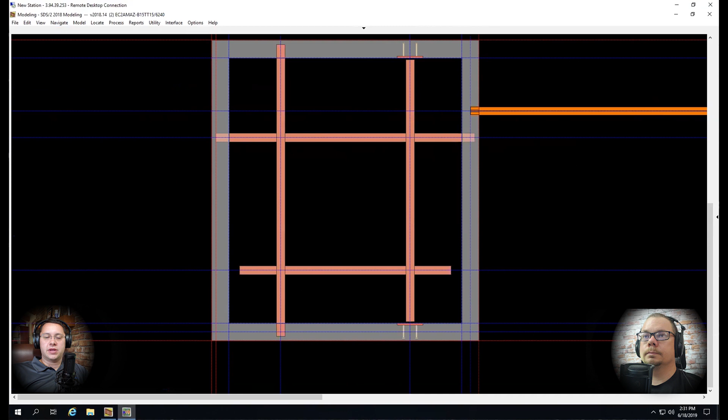So my basic premise here is that the embed plate member is better in a wide variety of situations. So I'm going to have Matt here take you through and show you some of those situations. So should we start off with the most basic bearing plate? Yep, so we're going to do a bearing plate for a beam. And we'll start out by zooming in here.

We've got a beam. Its work point is right to the face of the wall. And then we've given it 6 inches of bearing through its setback. You gasped. If you're a checker out there, this will make you very happy because the important point is always going to be that face of the wall, and then you add your embed after. If your detailers are making you back figure that without using their setbacks, they're bad people, and you should do bad things to them.

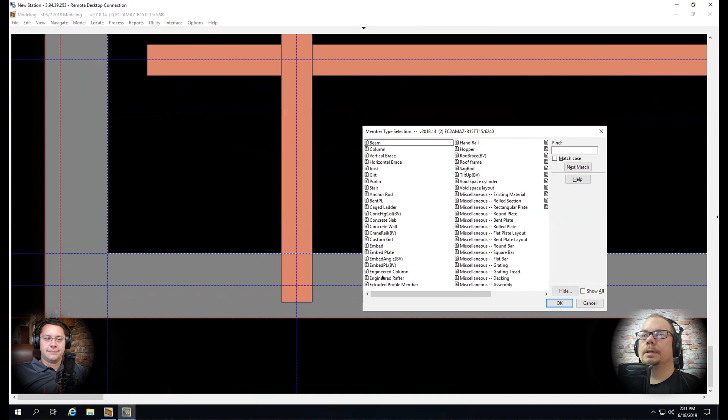All right, so when we select the add member, we're going to go to Embed Plate BV. And this goes all the way back to at least 2017, right? Yes, I believe this came into play in 2015, possibly even in 7.3, but it might be that in 7.3 it was just a parametric, so that may be where I'm remembering. Well, if you're using anything older than 2017, I don't know what you're doing here. You don't want to be listening to us.

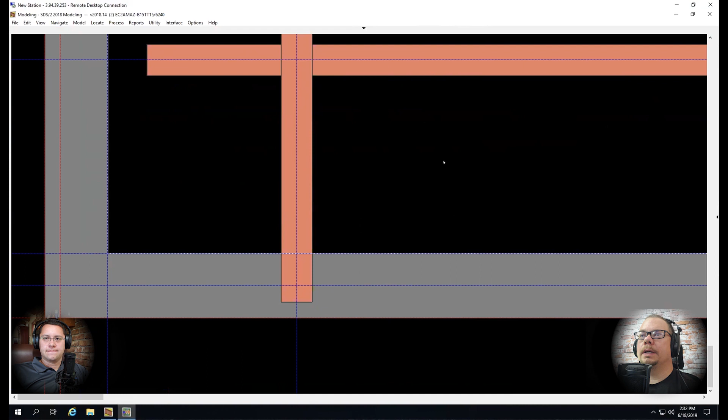So you want to pick this drop down and go select member bearing plate. Okay, and then you select the member. Now, does this have to be a beam? No, it does not. You can also do this on joists, which we will get to next. So in this case, we're going to just do studs spaced. And we want it to occur at the left end of the beam. And we want to set our plan rotation, in this case, to 180. And I don't want any additional setback from the work point. I want it flush with the wall.

It will give you a member x-axis rotation of 90. That's just making it flat level. If it's set to 0, it actually becomes a wall plate, which we'll get into in another couple of minutes. Okay. So it calls that the x-axis rotation, but it's not really the x-axis. Right? It is. That's the member line. It's along the length of the plate itself. So the plate is going to be put in perpendicular to the beam that you're locating from. Okay. So I'll just show you how that works.

So if we do a length of a foot and a depth of 6 inches for our standard bearing and a standard 3/8 inch plate, we can now locate where we want our holes to be, our studs to be. So let's get a spacing of, say, 9 inches. We go 1.5 on each side, and then top and bottom, we want them centered, so we're just gonna split this in half. So we'll go 3 and 3. Now if you move to the studs tab, you can pick the size and length of studs that you want to use. In our case, 1/2 by 6 is fine.

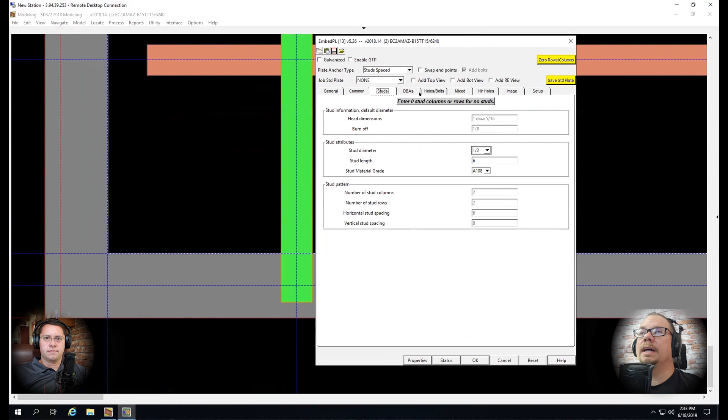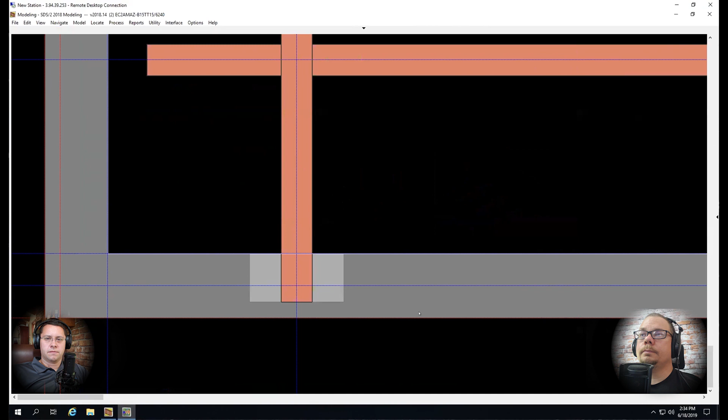And then one thing you do want to check the first time you run this on a project is the nailer holes. It will always default to having 2 nailer holes, which is great for a wall plate, but pointless for a bearing plate. So we'll set that to 0, and it'll now remember that every time we run it after this. And now we can pick again. Same thing. So now we'll go up, click on the same beam,

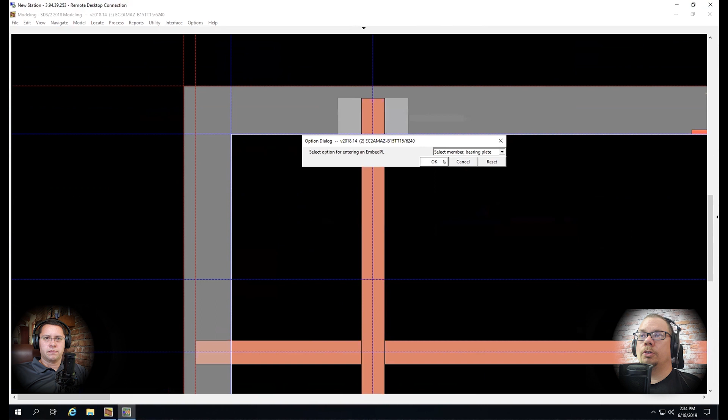and now we're going to go to the right end. Now you have to pay attention to where that member plan rotation is, because that's what's going to adjust where you are relative to the member line. So in this case, we're going to set it to 0. And now it's flipped around. Now just to show you what happens, I'll hit escape. If I...

No, you got to back that up. So the X rotation the first time was 90. Why is it 0 now? Nope, so that's... When you're thinking of the X rotation, and I'll change that right now so you can see what it does. The X rotation is its location along its length, which is going to be set to 90 regardless. The plan rotation has to do with how it's turned around that line on that point on the plan where the wall and the bearing plate meet.

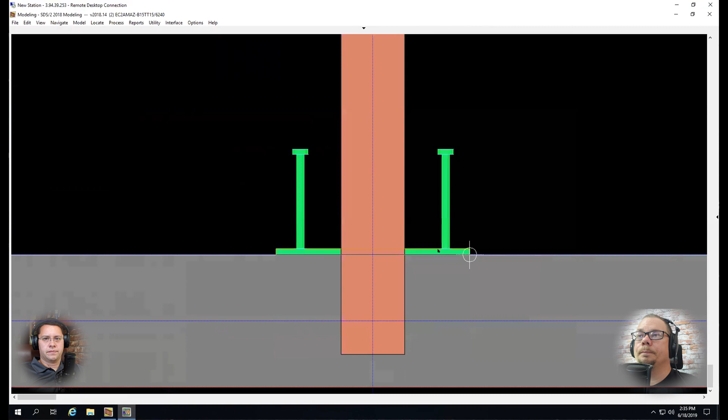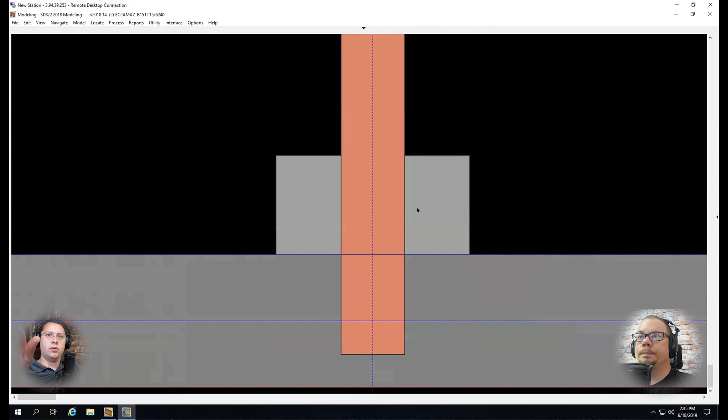So if I change the x-axis to 0, you'll see this turns into a wall plate. Okay. So I'll set that back to 90. But if I were to plug this in wrong, let's say I put this in at 0, you'll see that it spins the plate around. So rather than going into the wall, it's turned around. It's rotating about this point. So a plan rotation of 0 indicates that the plate is going to go away from you. Correct. Okay.

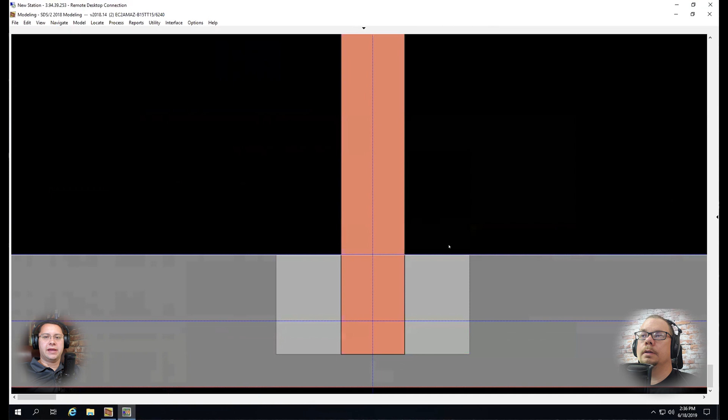And the x-axis rotation is the rotation about the x-axis. So if we were looking down the centroid of the member, it would be spinning about... Yes, so it will be spinning it along this axis right here, which will flip it up and over. And when you're making a bearing plate, the member line is perpendicular to the member line of the piece that you select. Yes, so now I'm going to run this again. So we're going to pick bearing plate. So that should be a 180 rotation if I'm thinking correct.

Well, so here's the thing, this rotation has to do with absolute plan. So 0, imagine a horizontal line with the plate sticking up. 180 is a horizontal line, the plate sticking down. So from there, if you know what 0 is, if you rotate minus 90, you'll get what we're after here. So it doesn't figure based on the member.

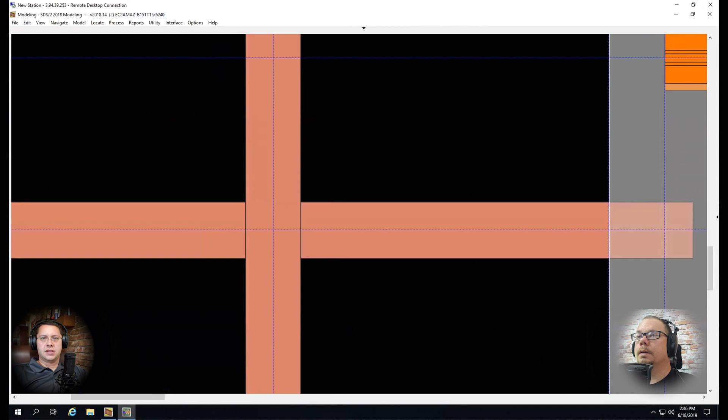Oh, I'm sorry, I had it set to left end. So it put it in the correct direction for what I was doing, but I was set to the left end. So I'm just going to delete that and re-add it. Pick this, we're going to go back to the right end, and now at minus 90 we get what we want. And now we're going to go left end. Imagine that 0 again with the horizontal line with the plate up above. If you rotate that horizontal line positive 90 degrees and go to the left end, we'll get again what we're after.

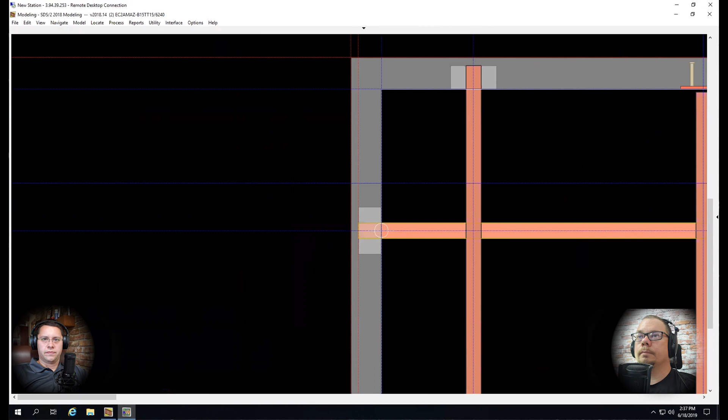And now over here I've got a joist. I'm just going to throw in another one. Left end again, 90 degrees, it's the same deal. Now, you see how that one put it in and it's sticking out wrong, right? So when you're working with a joist, it's a little bit different than working with a beam, because with a beam, your work point is going to be the face of the wall, and then you have your bearing on top of that. With a joist, it's the opposite, because you have to give the point that's the end of the joist for your work point. Otherwise, it'll deduct out for the bearing. So what you end up having to do here is flip it the other way.

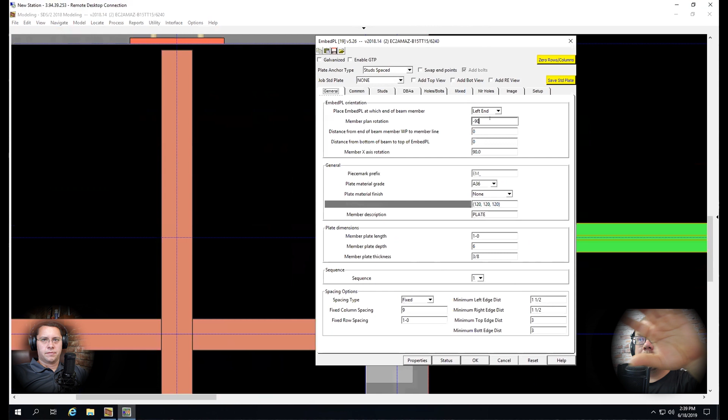So if I run this again, pick my joist, we're going to go left end, and now I'm going to go the opposite direction and go minus 90, because I still want it to be rotated that minus 90, but now I'm thinking about hitting from the end of the joist as opposed to rotating from the face of the wall. Okay, now obviously I don't need such a big honking plate. I only need 4 inches of bearing this time, which means I only need 2 inches up and down. And now I get a different plate. And you can obviously adjust the length the same way.

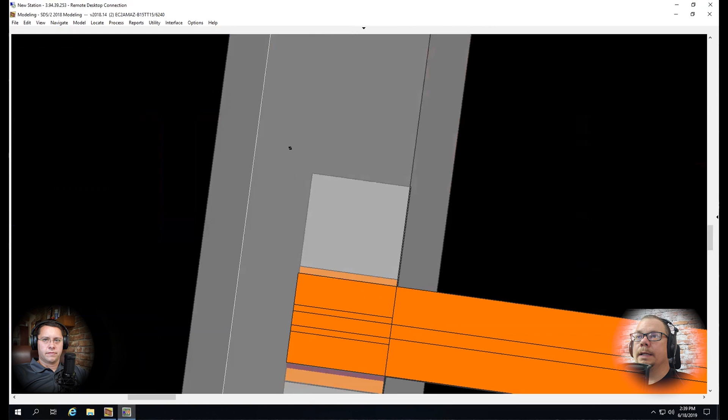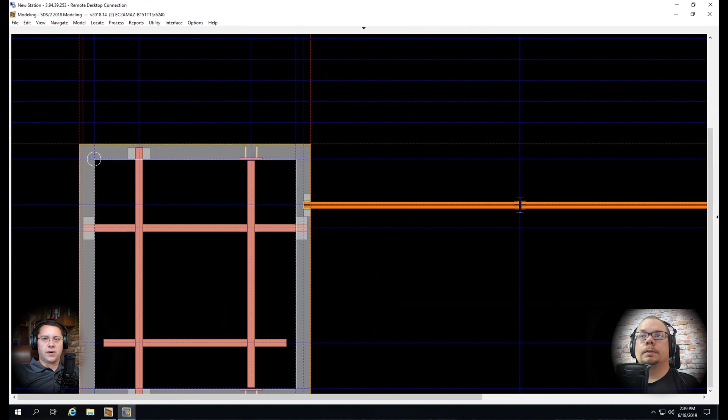All right, so let's go over those orientations again. Okay. The 0, 180, 90, and minus 90. Right. How do I remember those? Okay, so being the dumb guy that I am. Okay, so think of it this way.

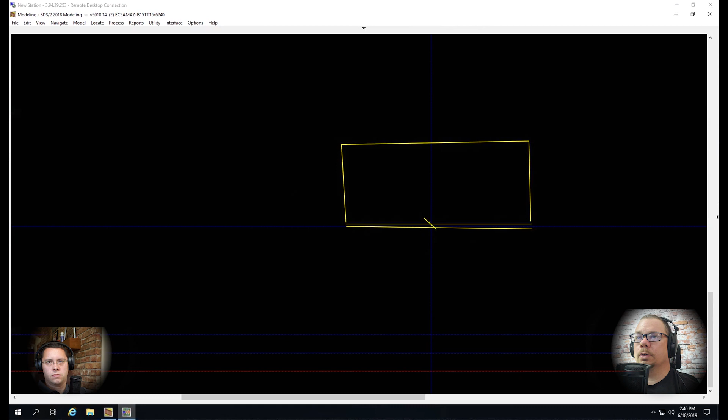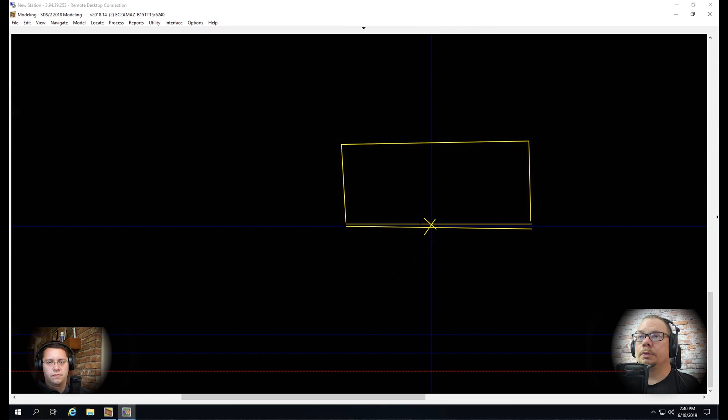This is your 0 rotation, okay? So this will be your member line. I'll just double that up. And then at 0 rotation, the plate will be sticking out this way. This is your reference point. That's the end of the beam, end of the joist, it's end of the member, however you want to think of it. This is what the system is going to use as that reference point to rotate around. So if you want the plate sticking down, then it's a 180 degree rotation.

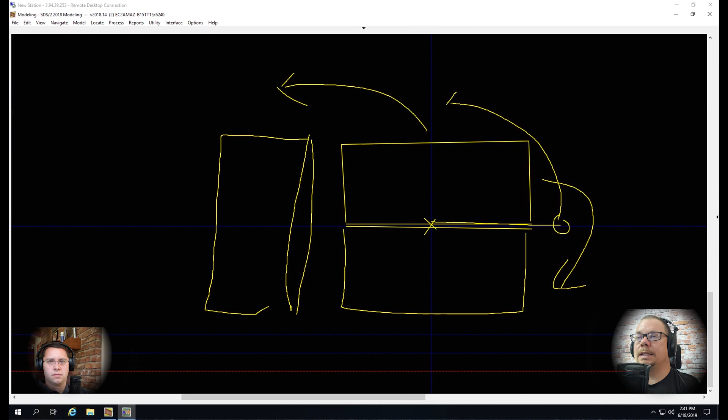Okay? If you want the plate to rotate, and I'll keep this double line for reference. If you want it to rotate this way, then you're looking at a positive 90 degree rotation, with this line being your 0. So it's 90 degrees up. When you want to go the other way, it's a negative 90. Same idea.

Got it. So the important thing really is to remember that at 0, the plate goes up. What I'd say is up. Yes. And that is independent of the direction of the member itself. So you have to plan the rotation. It does not determine that automatically. The only thing it determines automatically is the end elevation and the end point of the beam.

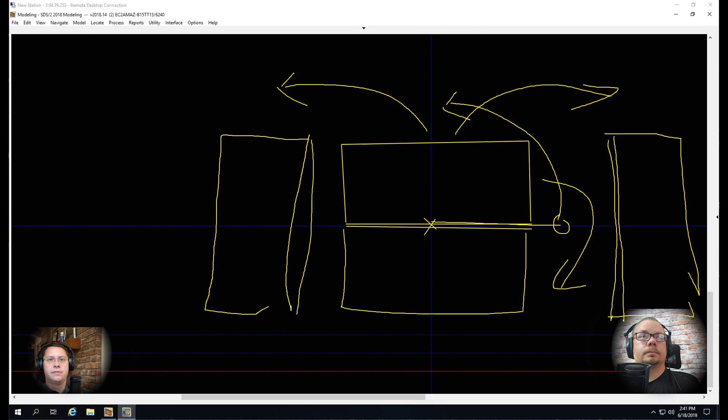Yeah, that's probably for the best because, you know, a lot of times there's walls that aren't perpendicular to your member. Right. Okay, that helps. Thank you.

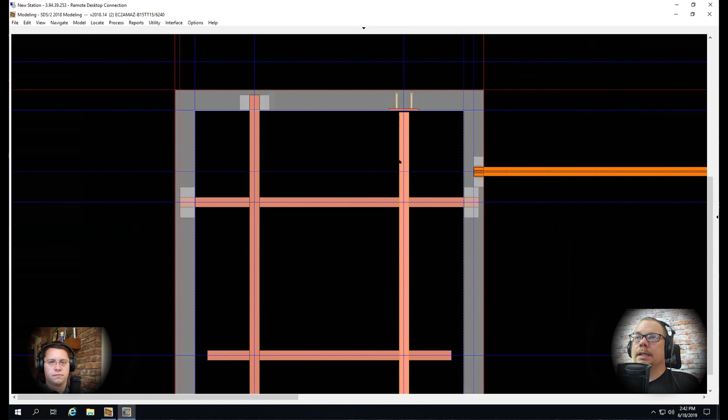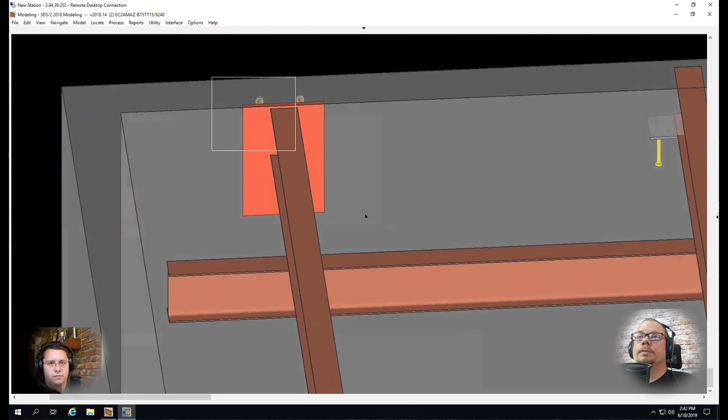So now, if you're using one of the newer versions of SDS, we've got this concrete wall member, okay? And if you set up your member, as I've got here, with just auto standard connections, it will generate these wall plates. And as a topic for a future video, because it's a whole different member, oops, swipe it, get it, there we go. It will automatically input this Embed Plate member, which is different than the EmbedPL.

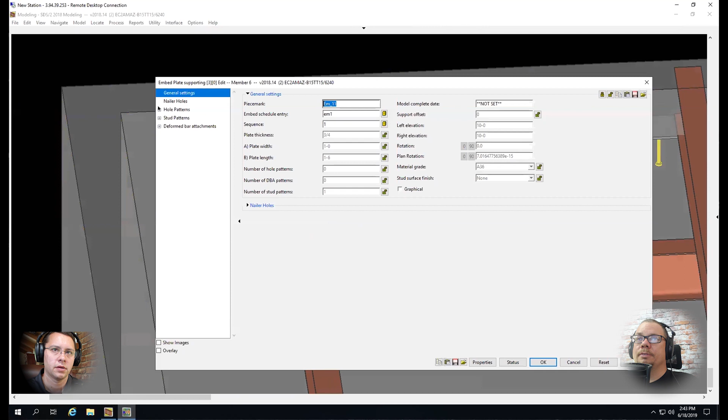Okay, it's supposed to be similar in concept, and it's got system designs to it, but this is part of the concrete embed package side of things, which, you know, you have the ability to work with these, but that's a whole separate video for us, I think. Yeah, well, and there are some real drawbacks to those. I can't elucidate them all right now, but I know that particularly the concrete wall member type creates processing slowdowns in SDS2, which I don't know if they fixed it yet, but I don't believe that they have.

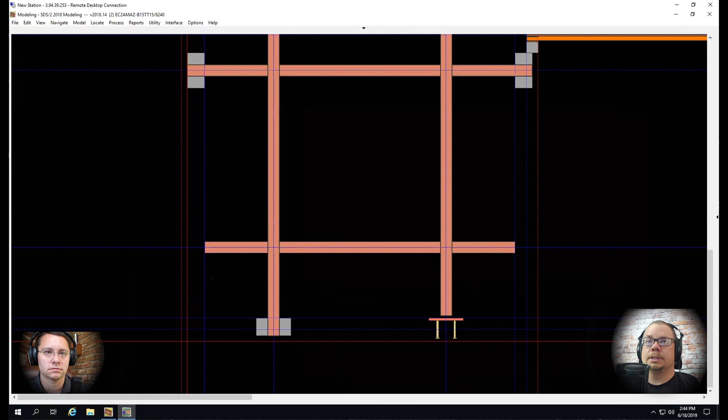One of the little drawbacks with that wall, too, is that it considers it a live member, so it's not the old dummy miscellaneous member that it once was, so it will attempt to create connections there. So I'm just going to delete this, but we'll keep these construction lines in so you can see where the wall was. Okay, so the next thing I want to show you is what you can do with a shear plate and a wall embed type plate.

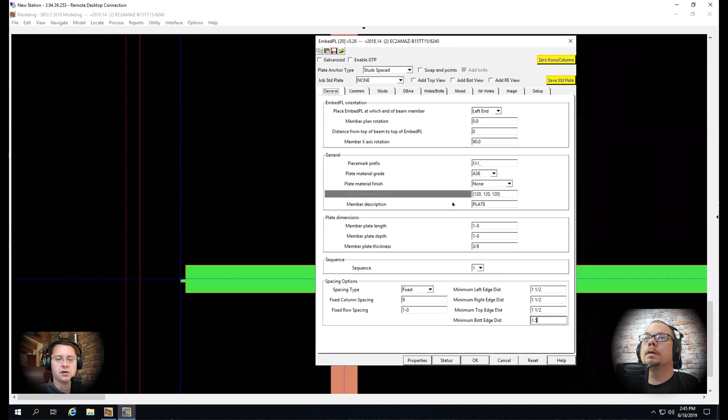So I'm going to just sort of run the same thing, only instead of setting it to bearing plate, this time I'm just going to select member. We'll set this to left end. Now, to me, that member plan rotation is wrong based on what you told me before. You are correct. Aha. I would rotate it minus 90. You got it.

Excellent. He can be taught.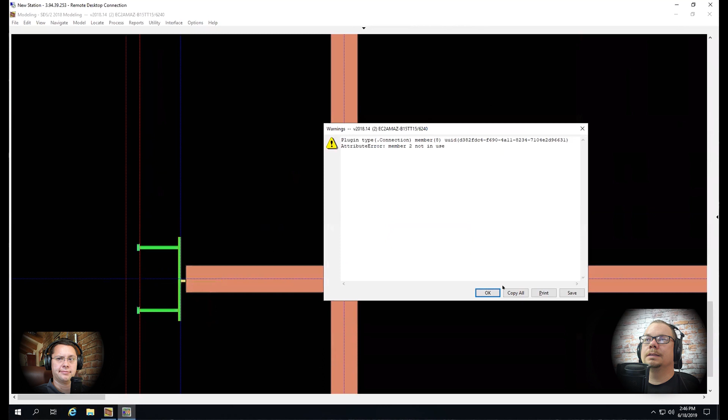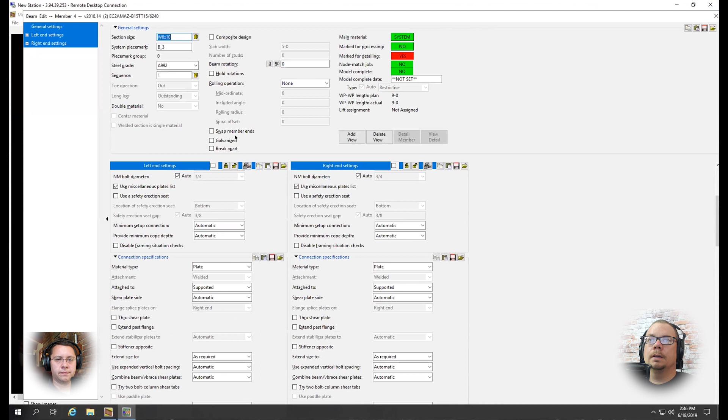So now, and we see this every now and then with jobs, although my stud spacing needs work, but what we see a lot is we get an embed wall plate, and then they're going to field weld the shear plate onto it. So we'll set up the shear connection in the beam member edit screen, and then set that to attach to the supported member. And another thing that you can do beyond that is then break apart, so that it will actually create the shear plate as a loose member if you want it that way, or you can leave it attached so that it's shop bolted on by turning off that break apart.

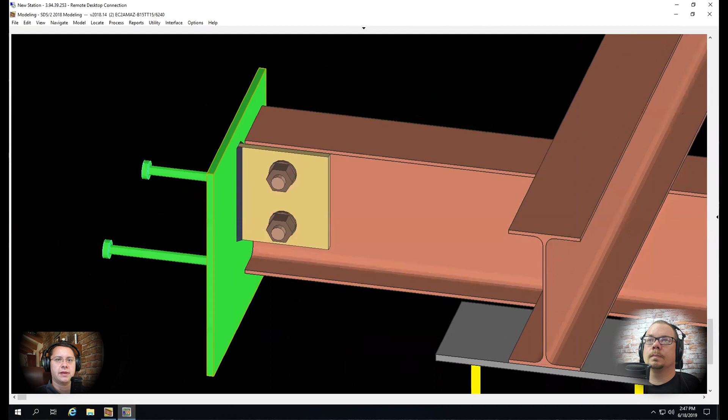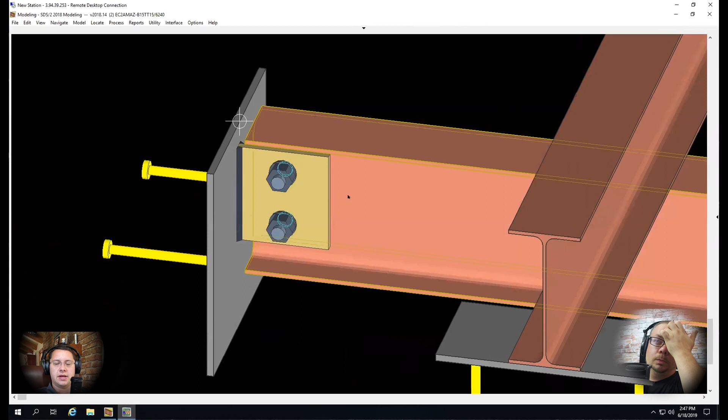Yeah, be aware, if you do break that apart, it's going to put it as a miscellaneous member. It will. And check out the detail that it gives you for that. Because I can't remember, but I believe with break apart, it's generally broken apart, and the view is whatever view you were in when you broke it apart. Now, I don't know if that's different with the checkbox, but if you did the BM, which I think is the funniest abbreviation for a command ever, if you use BM to break that member apart, you will get a wonky view on that piece. When you're doing this, I don't believe it does that, but unfortunately I'm in a modeling only license right now.

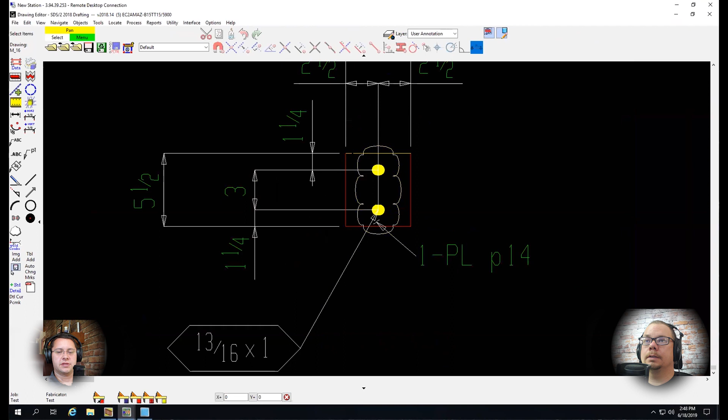So when you're getting this run on the broken apart member, when it's done by the system, it will create the flat view of the plates. It does not make it anything crazy. That's what you want. Yeah. So that's a nice looking detail. That's how you want it to look, with the exclusion of the clouds, which we'll forgive for the moment.

Great. Well, this is a brand new fabricator file setup. This isn't run by any of our customers, and rightfully so.

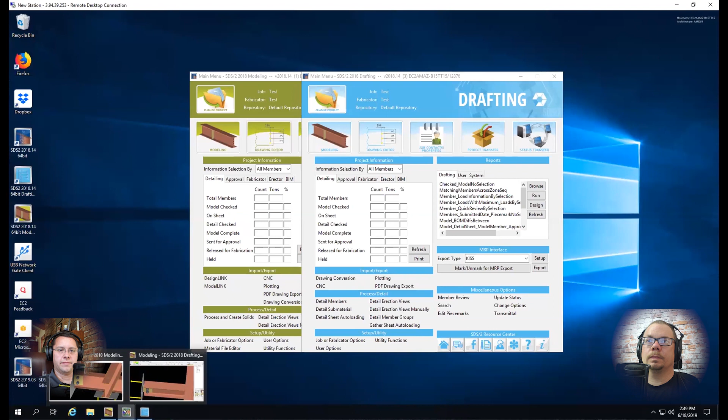Okay. All right, so we've got a wall plate there. We've done a bearing plate. What's next? Okay, so next up on the list, we see these every now and then. We get a moment plate that's going to be put across a couple of joists at the top of a column. Also known as a joist tie plate, depending on the person doing the talking.

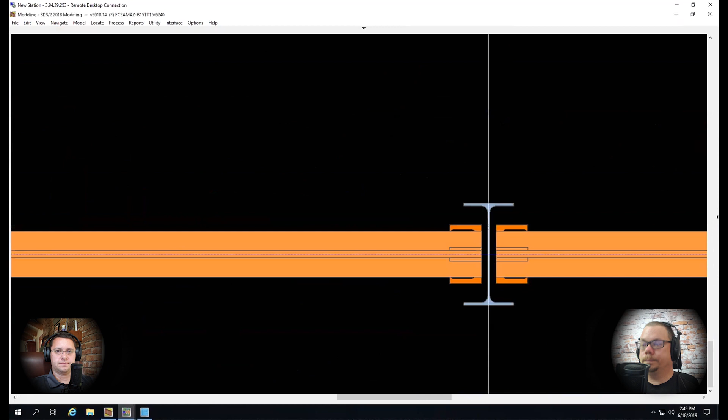All right, so if I've learned anything, you're going to draw 2 points from end to end of that plate. You're going to select a member rotation of, or a plan rotation of 0. But then you got to do some kind of setback, right? Or are you going to move the member line down? So we're going to move the member line down, which I've drawn in a line across the bottom, which is going to be my member line, and then I've given us a top one just so we can see if everything fits in correctly.

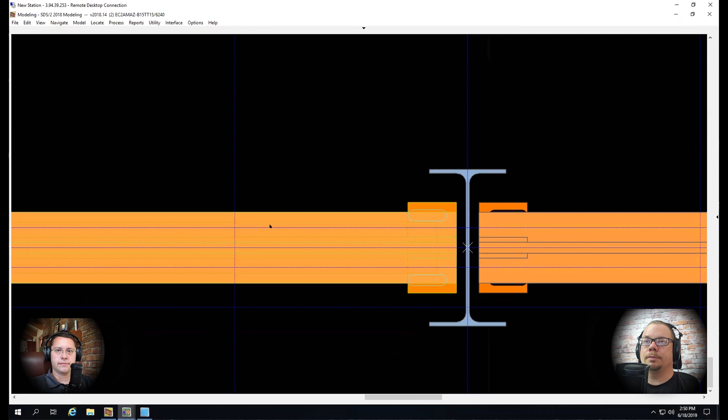Now, one of the things to watch out for when you're using this is top of steel is top of plate. So I've surfaced onto the joist, but if I'm going to use a 3/8 inch plate, I need to bump up my view by 3/8 of an inch. So now I'm going to pick. In case you don't know, the command to change the height of that view is RD, or relative depth. When you're using the relative depth command, up is a positive and down, as if you're sinking towards the floor, is a negative dimension. So he would have hit RD, the dialog popped up, he would have put in a positive 3/8 inch dimension and pressed OK.

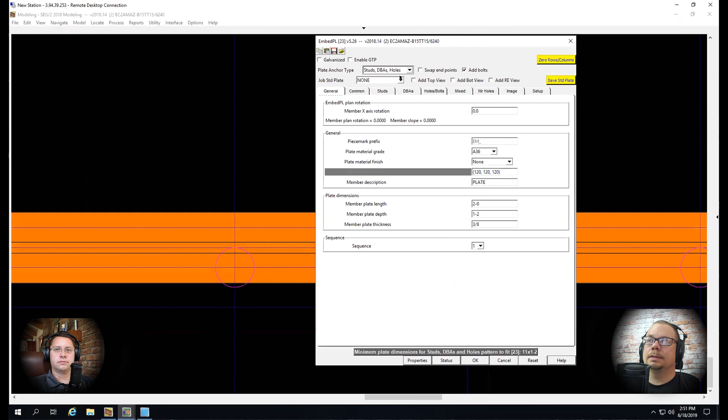Correct. So when you've picked 2 points, it will start off by giving you the plate length already filled out, with one exception. The exception being if you're not set to something that's spaced, if you've just got studs, DBAs, holes, then there will be a set of studs in columns, rows, and spacings between the studs, DBAs, and holes that will determine a minimum length for that plate, and it will automatically bump that up if you're insufficient. So you got to watch out for that. Yeah. Sometimes you may have to put that back.

Now in our case, I really wish this worked the other way around, where if you didn't have a plate big enough, it would drop the extra studs or holes. But 6 of one, half dozen of the other, I say. But yeah, at the very least, gray it out, or whatever, make a warning that something needs to be tweaked there. That would be better for me, I think.

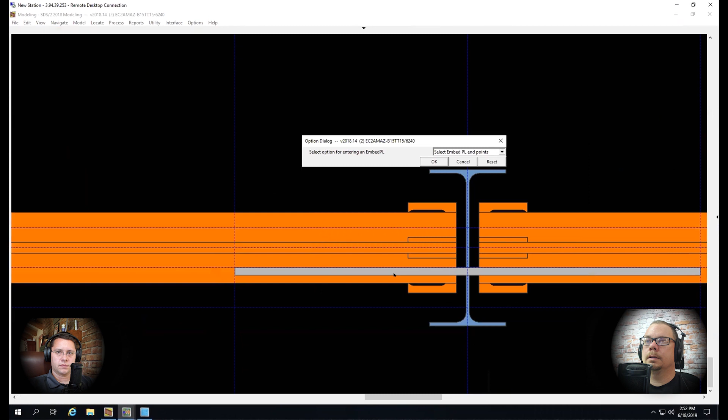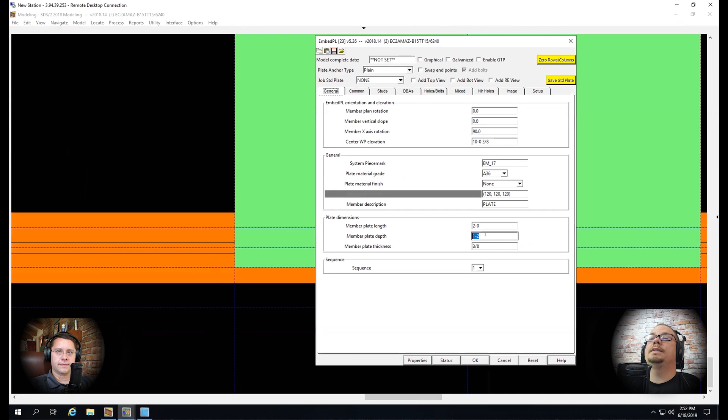But in this case, it's just going to be a plain plate, so I'm going to click plain. And again, I'm just going to double check to make sure I still have no nailer holes, which I don't. So you see how it takes away all of the fields for filling out studs and spacings based on my selection here. So now when I click on that, you got your x-axis rotation. I sure do, because I'm still set up from a wall plate. So I want to go back in and set this back to 90. What have you done? So you remember we discussed how it adjusts the plate size for you? It did. It adjusted the depth from 2 inches to 1 foot 2.

All right. So then let's just show that detail quick. I know you got to use the drafting station, but... Pretty straightforward. Yep. That's awesome. Now, I will go back. I want to show you one other thing before we press on to the last of it.

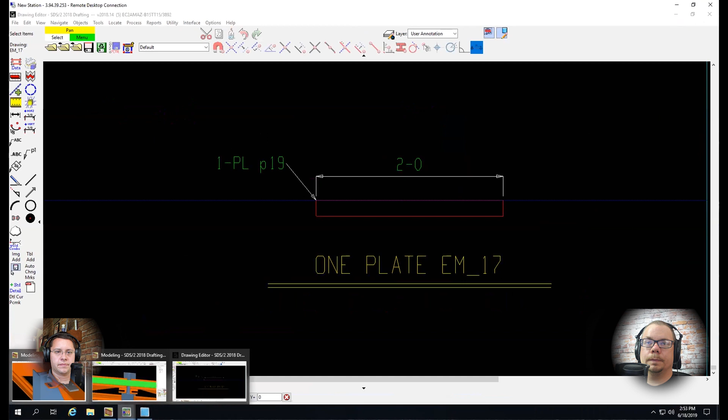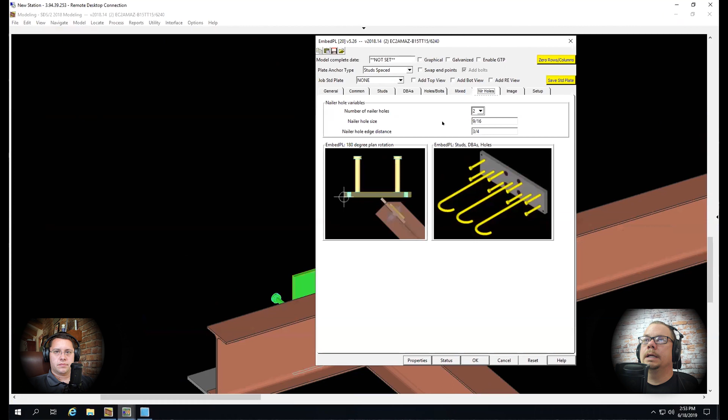Because there is a value to nailer holes. And that would be when you're actually dealing with a wall plate. So now I can set this up to either be 2 holes and they'll be in opposite corners, just like this. You can go 4 and it's all around, or there is a 6-hole pattern, but standard for us is just 2. And you can also set the diameter of whatever hole size you want. For us, this is fine. So flip back. We'll detail this just so you can see how this comes out.

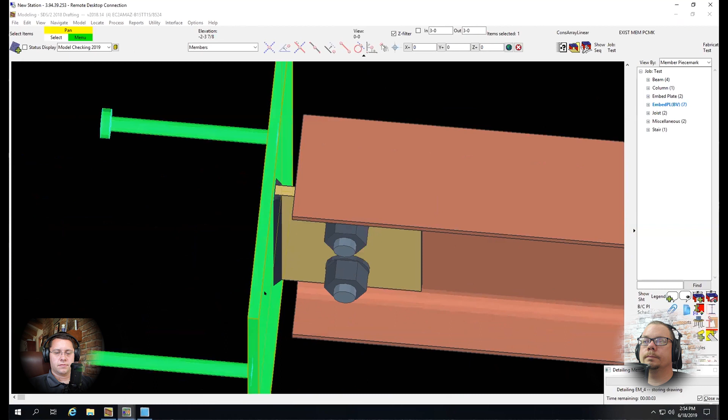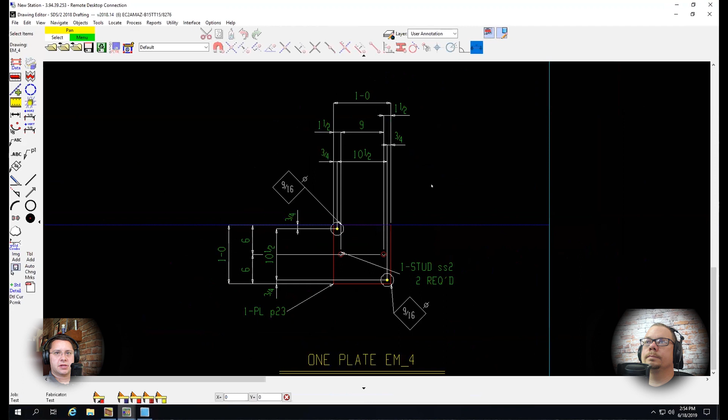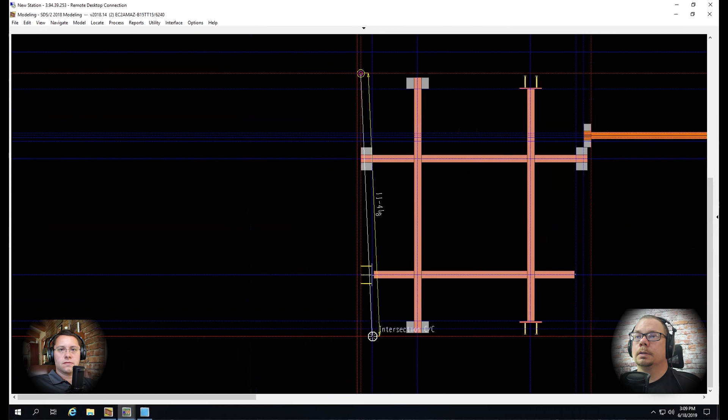All right, so if you would, take us through using a full length, what we would call a deck plate. Okay, so basically going to set it up, pick the endpoints. In this case, my plan rotation is not something I have to consider, because that's set up by my 2 work points. So the x-axis rotation is the only thing I need to worry about, which I will set to 90. The length is put in because I've given it a 11'4", and I only want a 4-inch plate in this case.

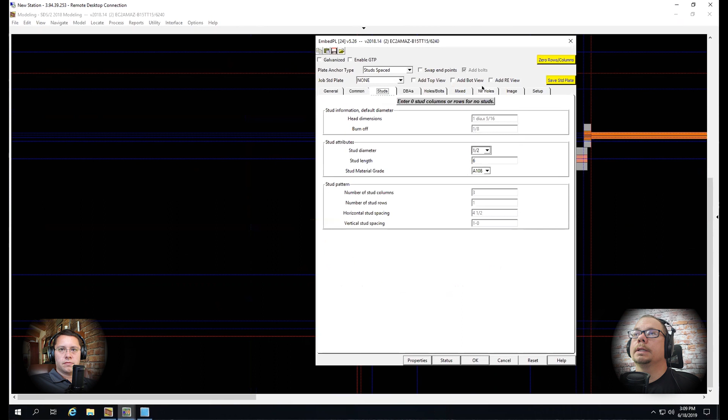So I need a top and bottom spacing of 2 and 2. Let's make sure we've got some studs picked out, and let's lose the nailer holes. That is a lot of studs, my friend. Sure is. So in this case, I've got a spacing that's awfully close together. We better work on that. Let's say it is 1 foot on center.

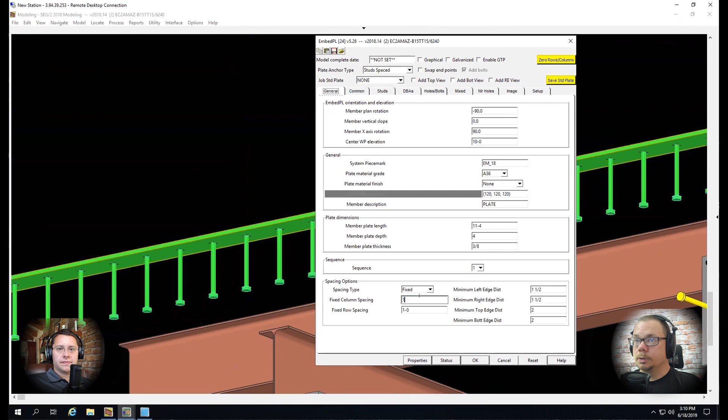That's better. Fixed. Oh, but you know what? The studs are the wrong size. 1/2 by 6. Oh, that's what they are. Let's go 1/2 by 4. Now we have shorter studs. Ah, but the engineer, he keeps changing his mind. Now he wants them at 36 inches on center.

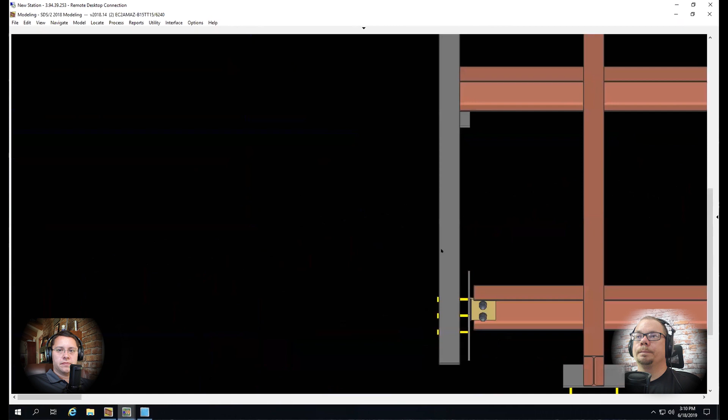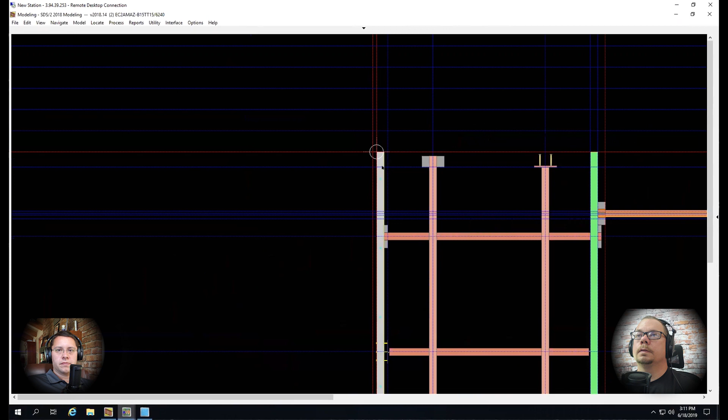So much super better. Easy to just keep flipping this thing back and forth. And you don't have to sit there and copy a whole bunch of materials all over the place or delete them back off. Now, does it work with multi-edit? So if we take one, we'll just copy it on over to the other side. Let's make it something ridiculous again so we can see all the studs. Look at that. Beautiful.

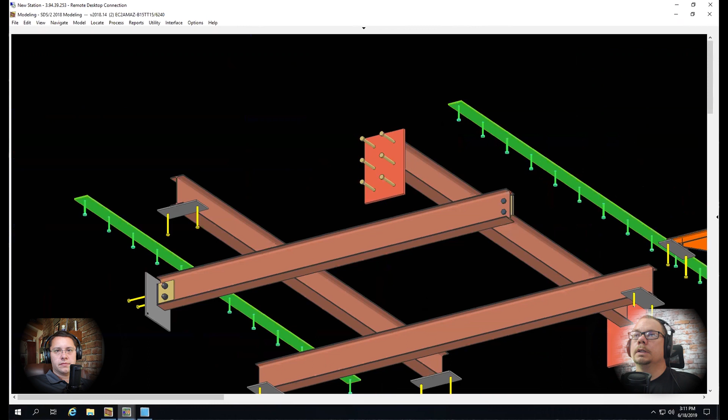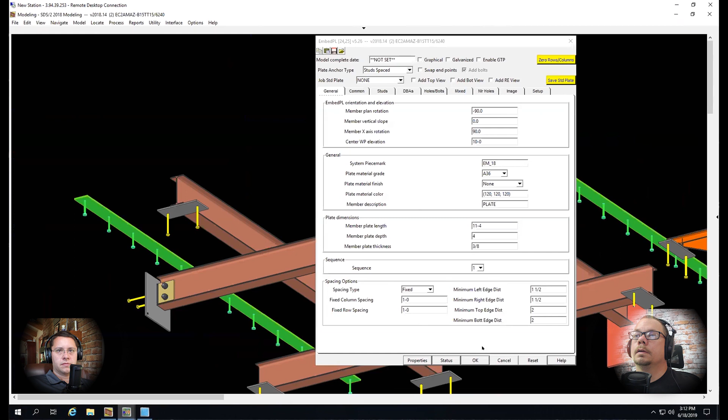Now, can you go over the job standard plate a little bit? So you're talking about one of these. Yep. So what this allows you to do is you can actually save a standard plate. So if this is a configuration of plate that I want to use someplace else, I can now save this. Oh, my caps are on. You could name it anything that you want, basically. Okay. So now we're going to want to get me set up with something different for just a moment, so it will remember this is my last plate rather than the other one.

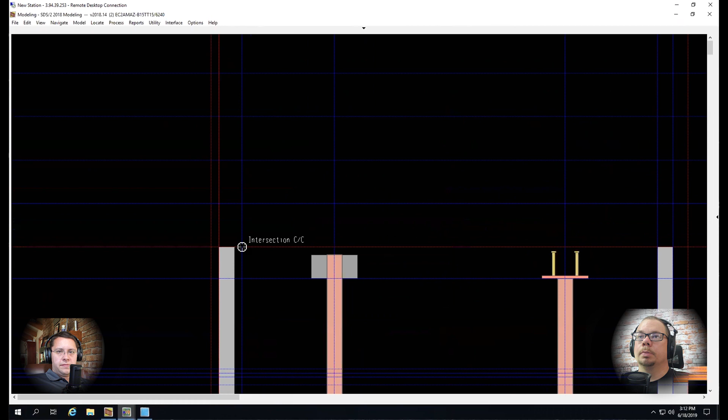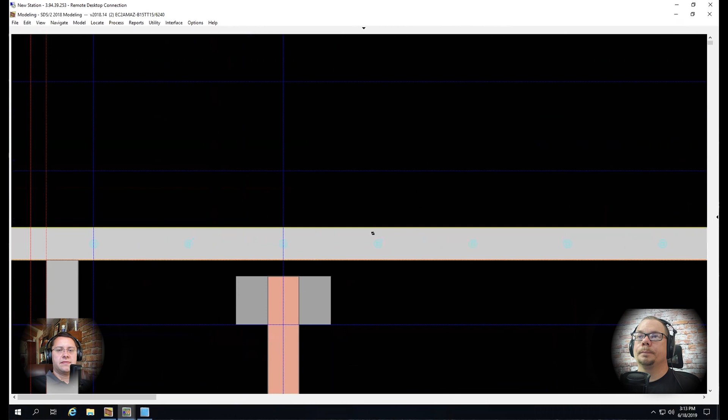If I go back to endpoints and we plug this in, now you can see we're back to a 9 spacing. We've got a 6 bearing. This has gone back to the original bearing plate. Okay. So now we should have the mat plate 1. And you can see that it kicks my spacing back out to a foot. It gives me a 4-inch depth. It puts everything back the way that I had it for that style of plate. So it's essentially the save form dialog box. Yes. Because it even changed the length on you. Yes, it did.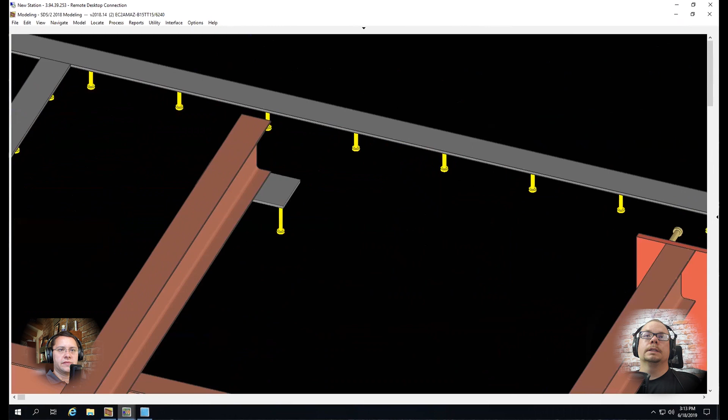Okay, cool. So is it intelligent enough to give the same piece mark to that when it's rotated 90 degrees? So let's just double check. This is F68. F68. And our member is EM18, and this rotated one is also EM18. So yes, it is. Awesome. All right, so are there any other locations you can think of to use this, except for every place that you need a plate?

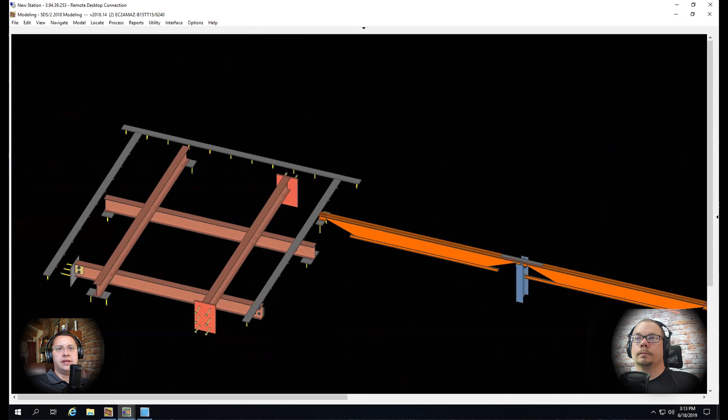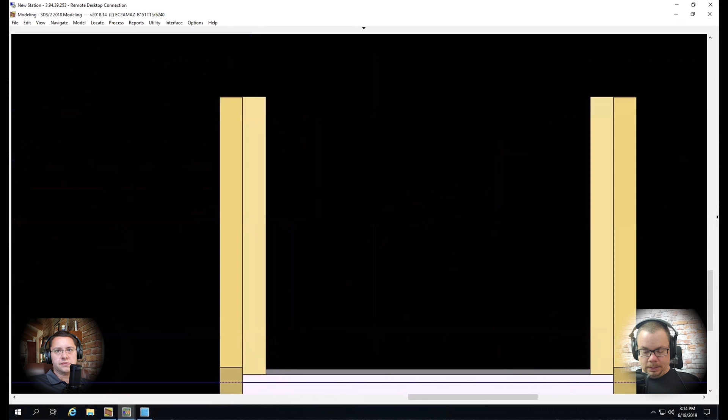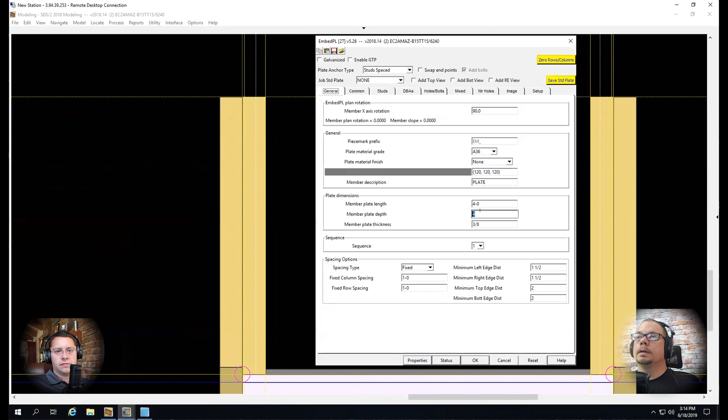Yep. Pick these 2 points. And I'm not entirely sure offhand, but I believe that measurement should be 3 feet. And in this case, it's going to be plain, no nailers. And instead of 3/8, I want to use 10 gauge plate. Oops. I was close. Close enough. Length I actually needed would have been 2'11". So I'll just fix that real quick. And there we go. Awesome.

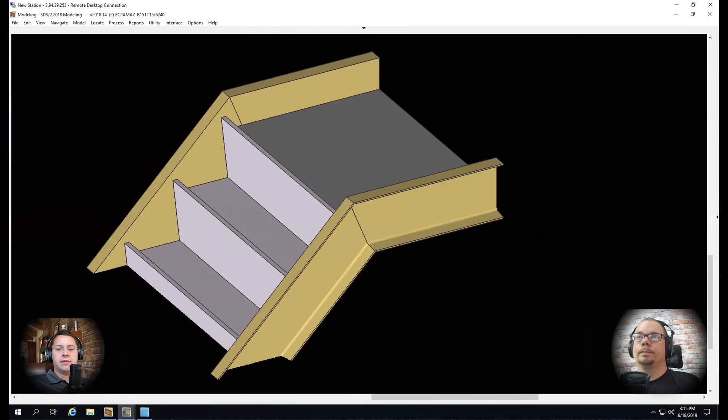So guys, you're going to want to use these plates pretty much every time you need a plate for a member. This is the way to go. It gives you a lot more flexibility. It gives you a lot of the ability to rotate, punch holes, put studs in, all the stuff that you really need to do with a plate type, and it's going to give you cleaner details, it's going to work faster, and your checker is going to love you.

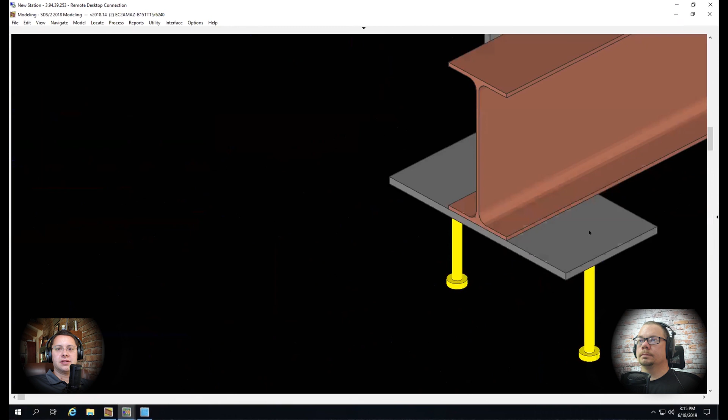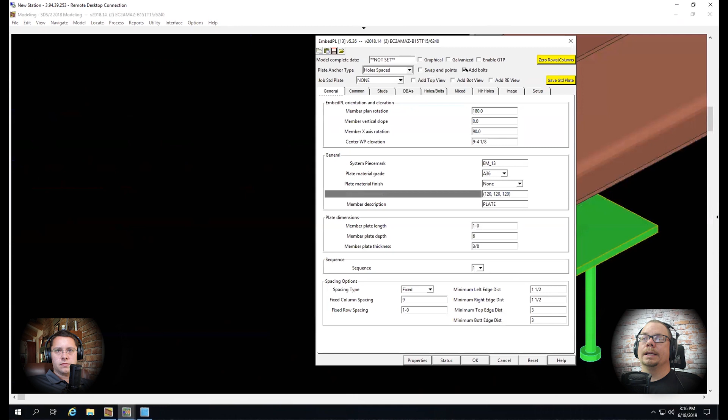Something I did want to show you, kind of a slick little move here, is sometimes you get a plain plate with a couple of holes, and then they're going to put some anchor bolts in it. So if we go to holes spaced, and we leave the spacing exactly how it is, I'm going to basically swap these studs for bolts. Now, I don't want regular bolts. I'm going to put in my own anchor bolts, but I will go here, and we are set to anchor bolt hole. Okay? So I say okay, and now I get holes.

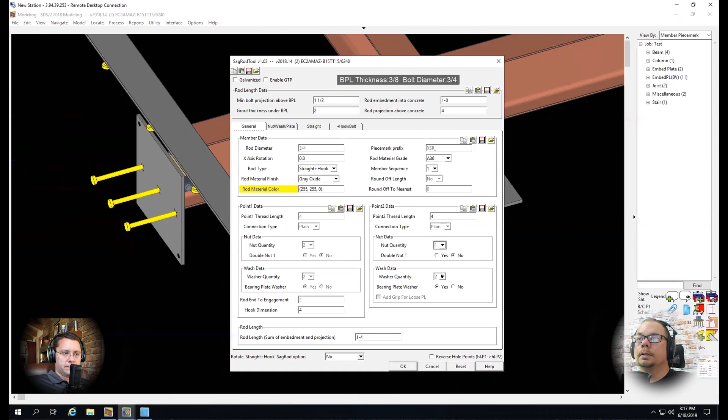Great. Now, if you recall from a previous video, we had the internal parametric add sag rods as anchor rods. So I'm going to set that to holes, select these, and now I'm just going to bang in something real quick, but let's make it kind of obvious. So we'll go with a hooked anchor bolt. Go with a single nut, and we'll just leave it with a standard bearing washer. Just something to get in really quick.

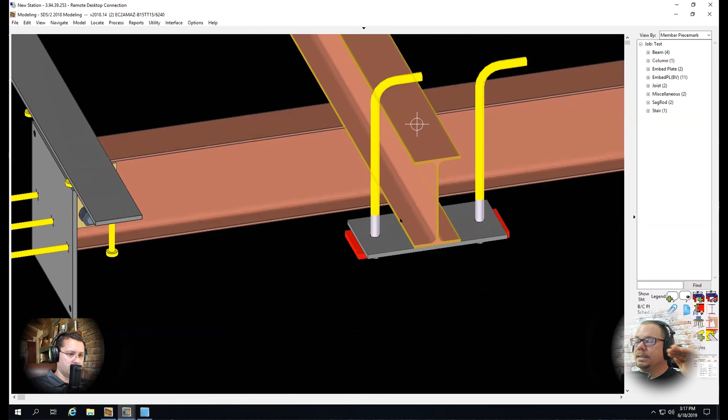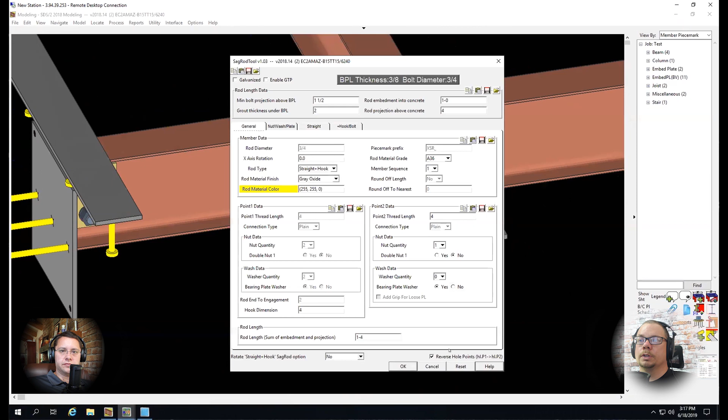Now, see how that popped in upside down? That's something to watch out for. If you're looking at the video that we did where it does this with leveling plates, the orientation of that member is considered a little bit differently. So when you're running it in this situation, what you actually need to do is once you select those holes and you've plugged everything in, you want to check this box, which I think I mentioned in that video, but I didn't get too much in depth because it does it right when you're dealing with that. Check this box to reverse the hole points. So that's going to flip this upside down, and now we get exactly what we're after.

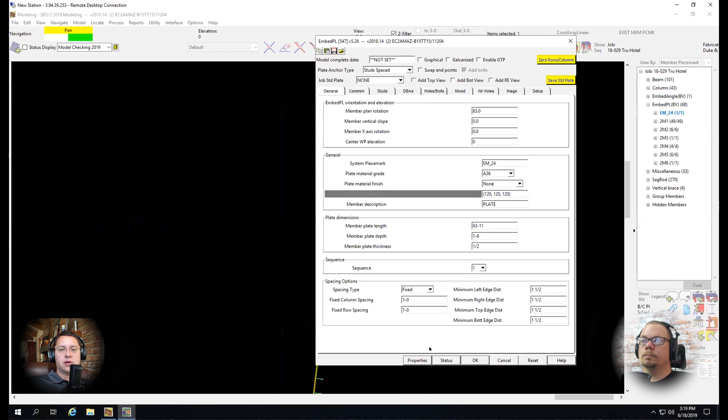All right, so here's kind of a treat for the checkers out there. If you are a checker, you're going to want to tell your detailers to go ahead and incorporate this into their member custom properties. So go ahead and bring up the member custom properties for this. Everybody's got a little bit of a different setup, but with ours, we have several different places for notes. And someplace in here, in one of these that's going to show up on the drawing, I want them to tell me where this bearing plate or embed plate or whatever else goes, what the structural section is. Give me a little bit of information about this plate so that I can find it on the details.

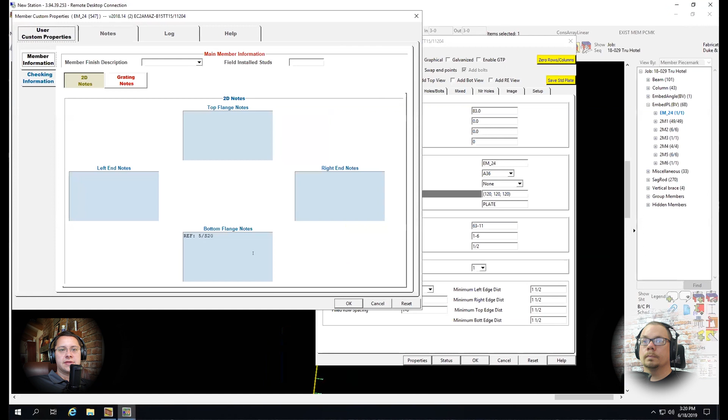And so when we detail that plate, you'll get a note right on the drawing that tells you where to look for it. It's very, very helpful, and if you detailers out there will use this, you will make your checkers very, very happy. Yes, I am talking to you, employees of United Structural. All right, so does that wrap it up, you think, for the embed plate custom member type? Yeah, that covers it for me.